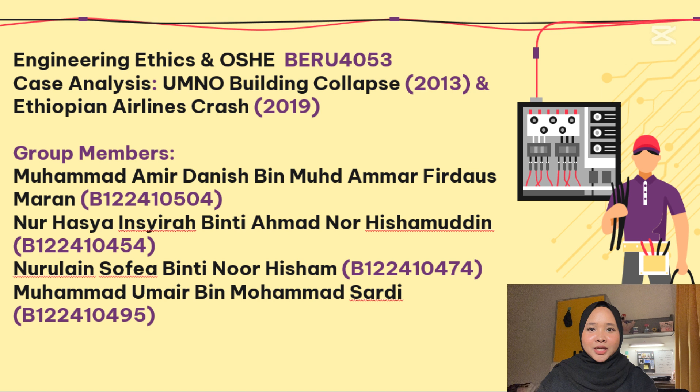In our presentation, we will be discussing 2 major incidents, which is the UMNO building collapse in 2013 and the Ethiopian Airlines crash in 2019. These tragedies highlight critical failures in safety and accountability, offering valuable lessons for preventing future incidents.

Both the UMNO building collapse and the Ethiopian Airlines crash are examples of preventable tragedies caused by systemic failures. By analyzing these events, we aim to understand the root cause, identify lessons learned, and emphasize the importance of safety, accountability, and ethical decision-making in various industries.

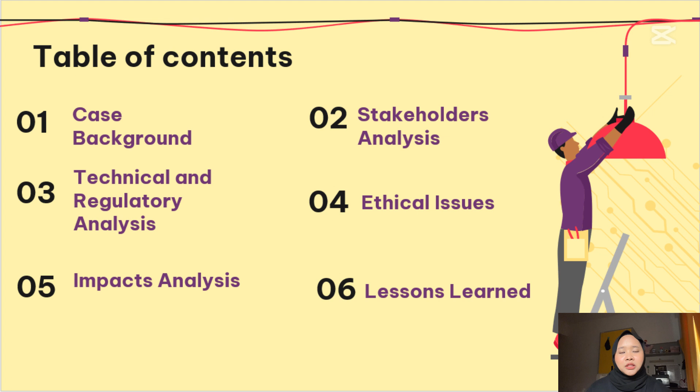Both cases highlight systemic issues in safety and accountability. For the UMNO collapse, the primary cause was structural engineering failure, whereas the Ethiopian Airlines crash stemmed from technological and regulatory oversights. These failures underscore the need for transparency, robust safety standards, and proactive risk management across all industries.

For the case background on the Ethiopian Airlines crash, the incident date is March 10, 2019. The aircraft is a Boeing 737 MAX 8, and the cause of the incident is MCAS malfunction due to design flaws and inadequate pilot training.

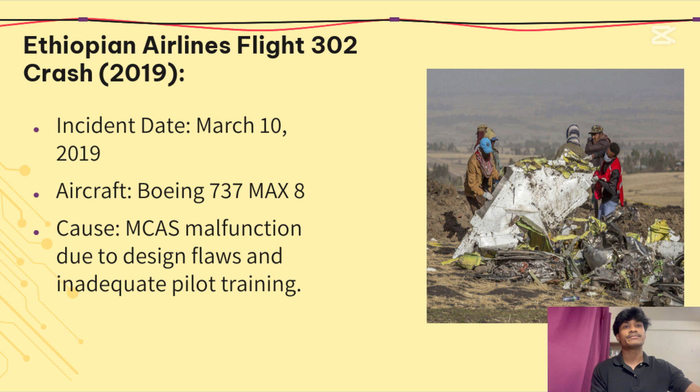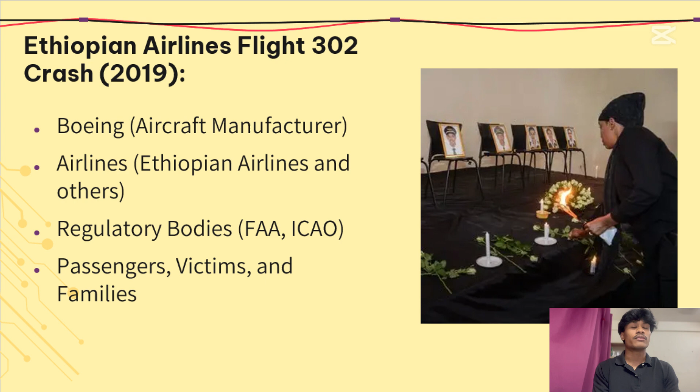Now we'll be looking at stakeholder analysis for Ethiopian Airlines flight. The first is Boeing, the aircraft manufacturer, then the airline itself, Ethiopian Airlines, and others: regulatory bodies, FAA and ICAO, and lastly, of course, the passengers, victims, and families.

Moving on to technical and regulatory analysis. Firstly, the crash was caused by a flaw in the MCAS system which relied on just one sensor. MCAS repeatedly pushed the plane's nose down when the sensor failed, even though the pilot tried to correct it. This design raised the plane's risk if the sensor malfunctioned.

Secondly, the FAA approved the 737 MAX without adequately testing the MCAS system. They relied too much on Boeing's checks, which missed essential safety issues. This lack of proper oversight allowed the dangerous flaws to go unnoticed until the crash happened.

Thirdly, pilots weren't given enough training to handle MCAS failures. The basic training didn't include enough practice with the system, leaving pilots unprepared when it malfunctioned during the flight.

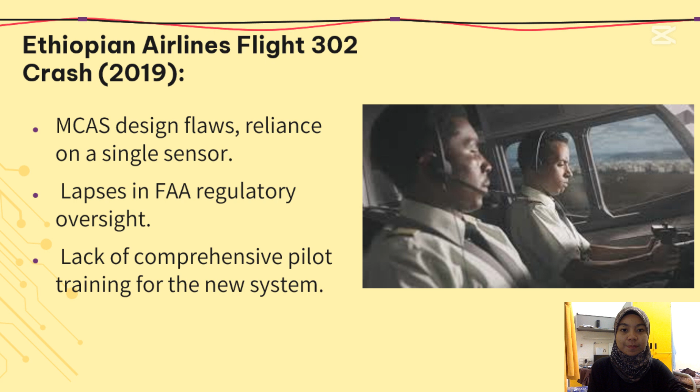As for ethical issues, firstly, Boeing focused on saving costs and beating competitors, leading to the rushed development of the 737 MAX. They cut corners by designing MCAS to work with just one sensor and avoided investing in necessary safety features. This showed that profits were put before passenger safety.

Secondly, Boeing didn't fully disclose the details of the MCAS system to airlines or pilots. They kept hidden information about how MCAS worked and what could go wrong, limiting pilots' ability to respond appropriately in an emergency. This lack of transparency put lives at risk.

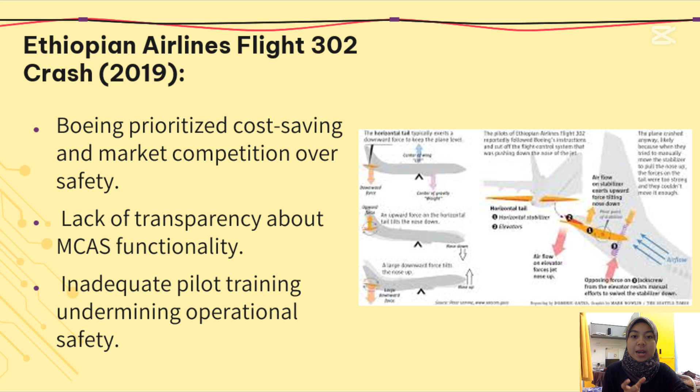Thirdly, Boeing and airlines did not provide proper training for pilots to handle MCAS failures. This inadequate training left pilots unprepared for an emergency, contributing to the crash. The lack of thorough training is an ethical failure in ensuring operational safety.

For impact analysis, the Ethiopian Airlines crash of 2019 resulted in loss of life and grief. The crash resulted in the death of all 157 passengers and crew on board, affecting families across 35 countries. This incident caused immense grief and became a globally known tragedy.

Next, the global aviation industry impact. The grounding of the Boeing 737 MAX affected airlines globally, leading to financial losses for both Boeing and airlines. It also damaged reputation and raised concerns about aviation safety.

Next, regulatory reforms. Aviation authorities, including the FAA, were criticized for flaws in the certification process, prompting regulatory reform to improve aircraft safety and oversight.

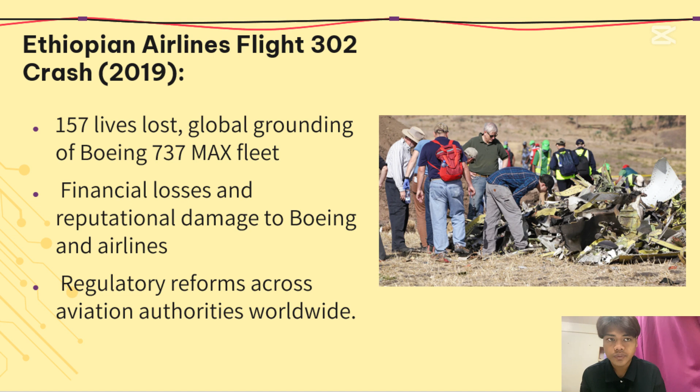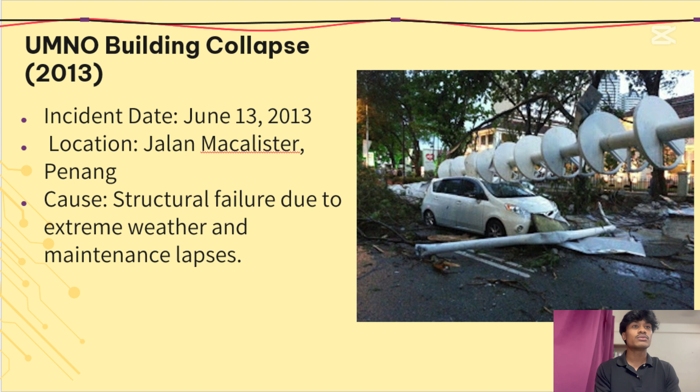Next is the case background for the UMNO building collapse in 2013. The incident date is June 13, 2013, at Jalan Macalister, Penang. The cause is structural failure due to extreme weather and maintenance lapses.

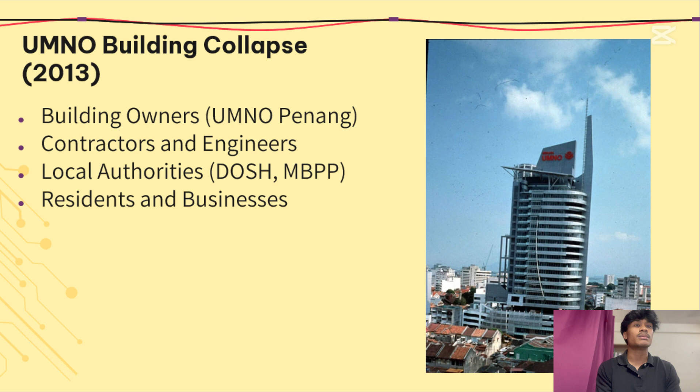Next, the stakeholder analysis. First, the building owner itself, UMNO Penang Tower. Second, contractors and engineers. Third, local authorities, DOSH and MBPP. And lastly, residents and businesses.

Moving on to technical and regulation analysis. Firstly, the UMNO building collapse shows the dangers of neglecting regular maintenance and safety checks. Over time, buildings wear down, and without proper inspection, issues like cracks or corrosion can weaken the structure. In this case, the building wasn't regularly checked and safety protocols were either missing or insufficient, allowing minor problems to grow into significant failures.

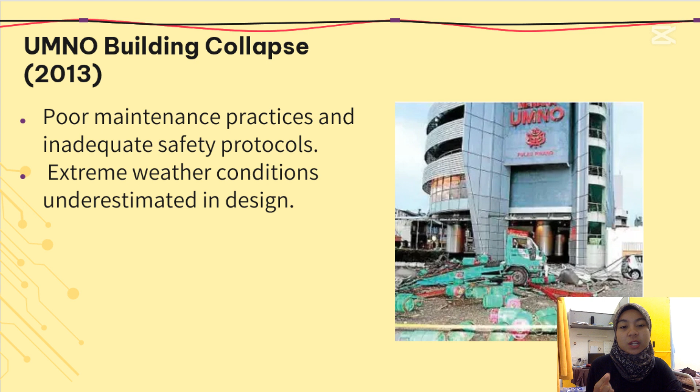Secondly, the building design didn't correctly account for extreme weather, like heavy rain and strong winds. In Penang, where such conditions are common, the roof drainage system should have been designed to handle this stress. By ignoring these factors, the building's ability to withstand harsh weather was weakened, contributing to the collapse.

Moving on to ethical issues. Firstly, building owners must keep their property safe through regular maintenance and inspections. In the collapse of the UMNO building, this responsibility was neglected. Signs of wear and tear were likely ignored, putting the building's stability and people's lives at risk. This shows an apparent failure to prioritize safety over convenience or cost savings.

Secondly, regulators and contractors also failed to ensure safety. Regulators may not have enforced proper safety standards. In contrast, contractors might have cut corners with poor materials or designs. This shows a lack of focus on public safety, putting economic or operational gains ahead of protecting lives.

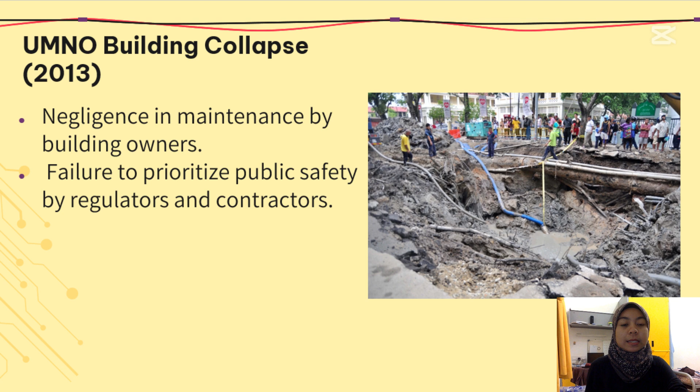Next, impact analysis for the UMNO building collapse 2013. First, fatalities and injuries. The collapse caused the tragic death of 2 people and injured several others, including pedestrians and passengers hit by falling debris. The emotional impact on their families was significant.

Next, property and economic damage. The surrounding area experienced heavy property damage, including crushed vehicles and affected businesses. Local businesses had to close temporarily, causing financial losses and disrupting daily activities.

For the lessons learned: the importance of robust safety standards and ethical accountability. Second, the need for proactive maintenance and regular structural inspection, and transparency and collaboration among stakeholders are critical for safety.

So the conclusion of our topic is that addressing system-wide issues in safety, regulation and accountability is essential to creating more secure and reliable practices across industry. This challenge often stems from gaps in oversight, inadequate standards, and a lack of clear responsibility, which can lead to severe consequences if left unaddressed.